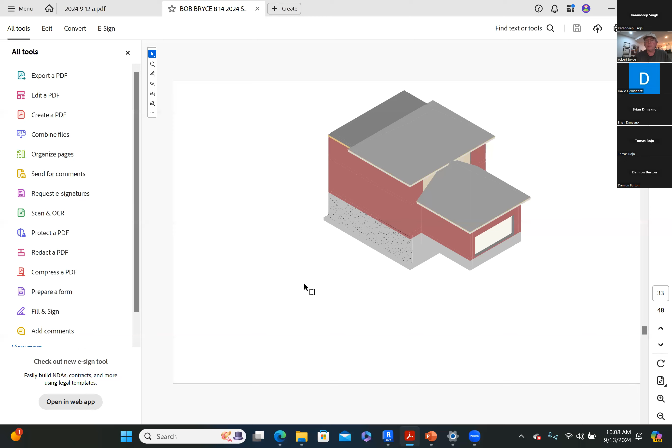I should have looked at the table of contents to see what sheet we should look at first, but anyway, this will work. Just scroll through - it's always a good idea to be familiar with the architectural plans, to go through all the different sheets.

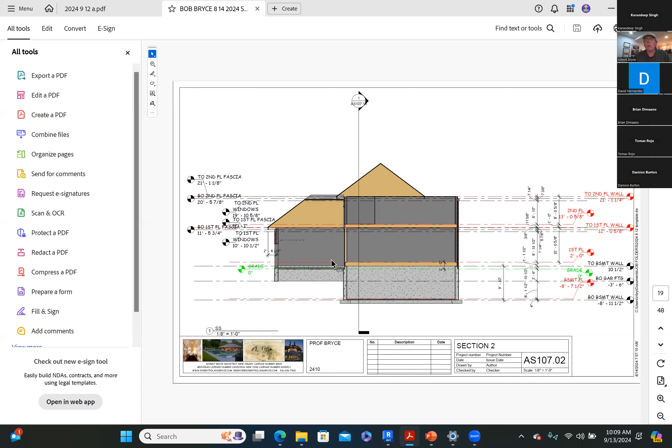I might be looking at - you know what, I think I'm looking at the wrong one. Yeah, I am looking at the wrong one. I'm in the right class though. I guess we'll just go over to Brightspace and do it that way.

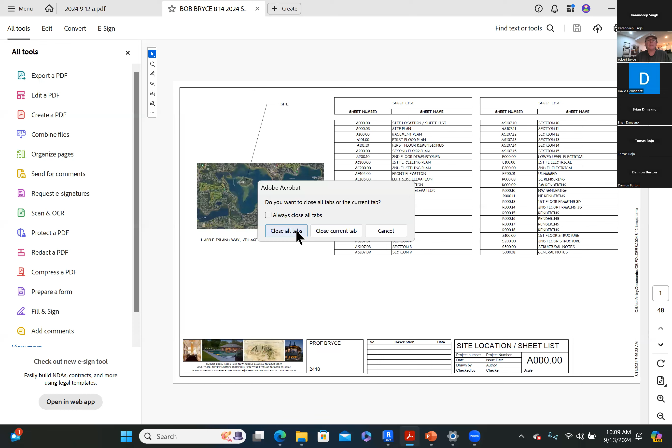So let's see, if I close this down, let's drag this over. Building service systems. I'm looking here to navigate to Brightspace - I'm doing it on the other screen. Okay, here we go - quick links, Brightspace.

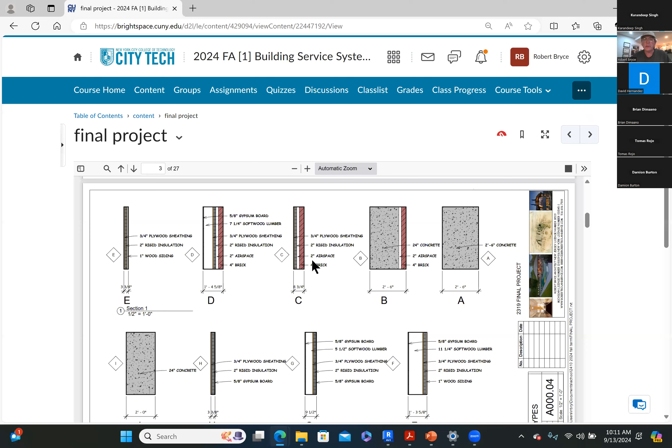So we're looking for wall type C, which is this wall, with 2" airspace and rigid insulation. Wall type C would be the brick area of the house. Let me make this a little smaller.

Wall type C has brick on the outside, so we can see it doesn't go all the way around the house. It doesn't go here because there's no brick on this part. So the answer is wall type C starts here and goes all the way around, but it stops here.

So for your linear distances, you would measure these distances. One of your classmates just asked—you would add these linear distances and then multiply it times the height. So let's go take a look at that wall type C.

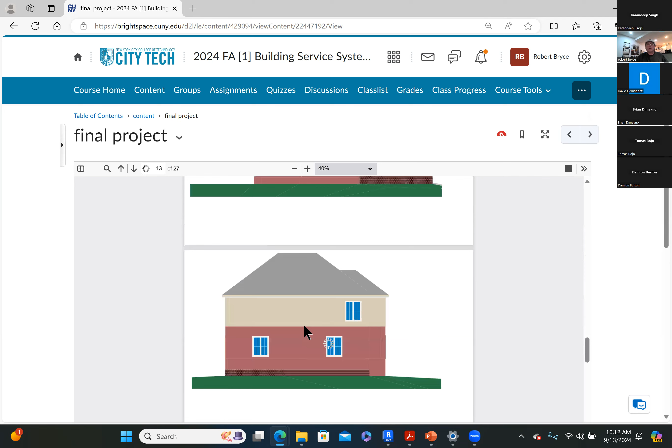See, it has brick on it. If we look at a section, where does that occur? We can see wall type C is right here. You can see that it's 3'6" tall. So that's going to be your height times the perimeter, which will give you the area of wall type C.

Does that make sense? Yes, Professor, I see that you were looking at the first floor. So based on each wall type shown on this dimension plan right here, it determines which floor it's on, because it looks like it's just below the first floor. That's why I was looking at the basement dimension plan.

Well, you can see this section cuts through the house at the garage. So you can see there is no wall type C on this side, on the wall that's common with the house and the garage.

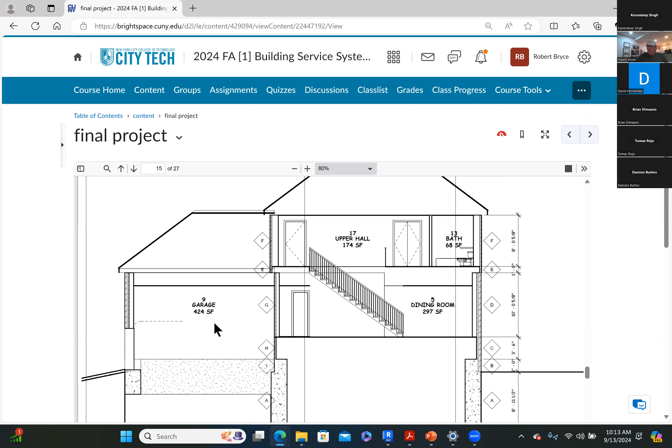We can take a look at the floor plan here and we can see. I just want to keep it documented that nothing is happening and that we both respect each other.

You can see that wall that's common between the house and the garage—this is the garage and this is the house—doesn't have wall type C. Everywhere else around there, it does have wall type C.

Got it. All right, any other questions about the project before we get started on the content of the course itself?

I'll just remind you that this is a very time-consuming project. Therefore it would be in your best interest to start taking the little baby steps towards finishing. Right now, just calculating the area of the different wall types would help you get started on the project.

I have also uploaded to the content area the spreadsheet you can use to answer the very first questions, which are: what are the areas of these different wall types? It's simple math—you take the perimeter and multiply it times the height, and that gives you the area.

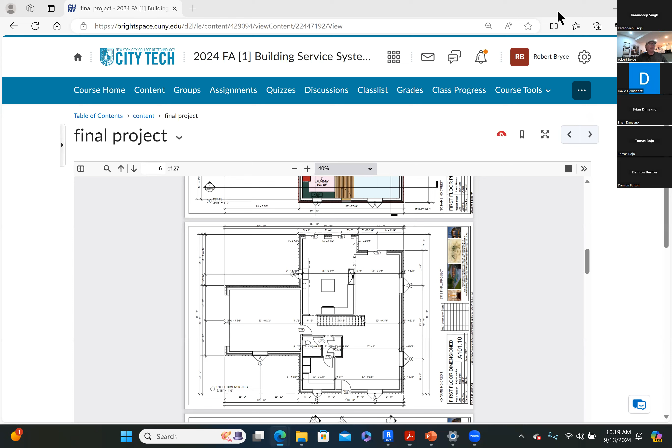Let's see if I can move this out of the way. We last left off talking about letting nature deal with things, but not actually following that tested true method of dealing with the cleansing of water, for example. We've decided to build huge processing plants like this, which is very expensive and very industrial, when we could let nature do it the way it has done for billions of years. Somehow we've come along and thought, well, we know better. We can do it better.

A possible argument would be that, like in Manhattan, there's no way we could use the earth to the area of Manhattan, because it's pretty much covered with buildings and hard surfaces, except for Central Park and some other parks, but there's not a lot of area. So the argument could be made that for some places, this is the proper solution. But as you progress into your profession, it wouldn't hurt you to ask, as you're trying to solve a problem you're paid to figure out or contribute to figuring out, to stop and say, well, how would nature do this? Could we use nature to do that?

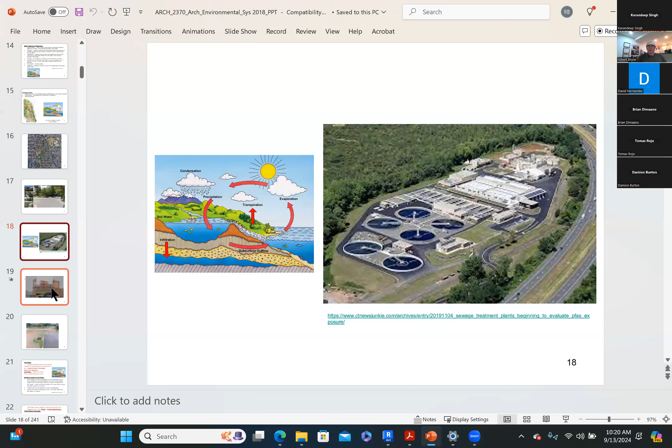I like to watch a lot of YouTube videos - that's my source of a lot of information, and also my source of entertainment. As you know, on YouTube you get all kinds of little videos that pop up, and I often see videos about construction disasters. I'll show one, and then we'll go to the next one and talk about it. I think if I click on this there might be a little ad ahead of time because it's YouTube, but we'll get to the disaster in a second.

That just happened to be an ad that came ahead. But watch this - watch what happens here with this house. It's a disaster. I like to watch these kinds of things only so that I don't make those same kinds of mistakes myself. In that case, when I design my houses, I wrap the entire outside surface in plywood, and you'll see that your class project has plywood wrapped around the whole perimeter, which would stiffen it up. I think they failed to do any kind of stiffening of that house, and that's why it failed.

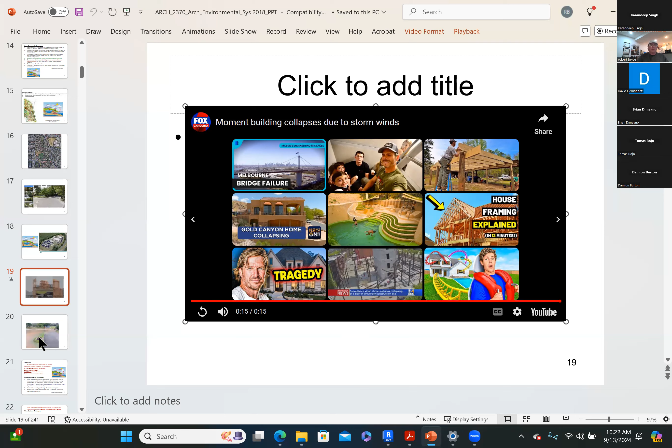But if we take a look at this one, this is also an example on those sites of bad design, when in fact it is environmentally a very appropriate design. I think the purpose of this was to demonstrate that this drainage inlet should be lower, not higher, than the surrounding area, so the water can drain into it. But if you take a look at this - I'm not saying it was done intentionally - this is the environmental way to do it, in that you let the earth percolate, let the water percolate into the earth first, and then when the water level reaches a certain height, you start to take the water away into our man-made solutions.

I was talking to a gentleman the other day about how we haven't seen this kind of flooding years ago. Communities didn't flood like they do now. One reason they flood now that they didn't before is there are a lot of hard surfaces.

This surface won't let any water percolate into the ground, but this one absolutely allows water to percolate into the ground, similar to that example in Davis, California, where they implemented things like this to let nature work properly. But in the event it got really flooded, we have a backup system that would take the water and relocate it to another area.

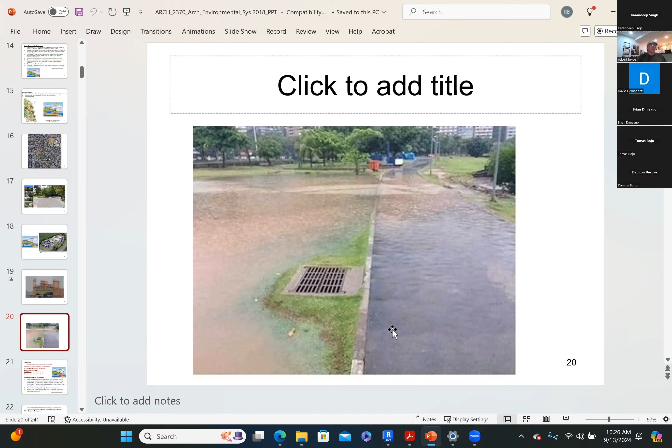So back to water. We talked about water percolating into the ground, and that's set up pretty much exactly like the example of the plastic bag hanging from the tree, where you put different filter materials in to get clean water. We're replicating what nature does naturally.

Inside the earth there's a tremendous amount of limestone. As water travels around that limestone, it absorbs magnesium and calcium from it. The water is still drinkable, but once it becomes saturated with that calcium and magnesium absorbed from the limestone, it becomes what we call hard water.

Hard water is not good for cleaning—it prevents soap from sudsing. We have hard water at our house because we have a well, and the water that percolates around the source our well draws from has a lot of calcium and magnesium in it. So we have to have a filtering system that separates the calcium and magnesium from the water so we can use it. Without that system, we wouldn't be able to wash dishes because the soap wouldn't suds and help clean. Same with taking a shower—the water and shampoo wouldn't suds up.

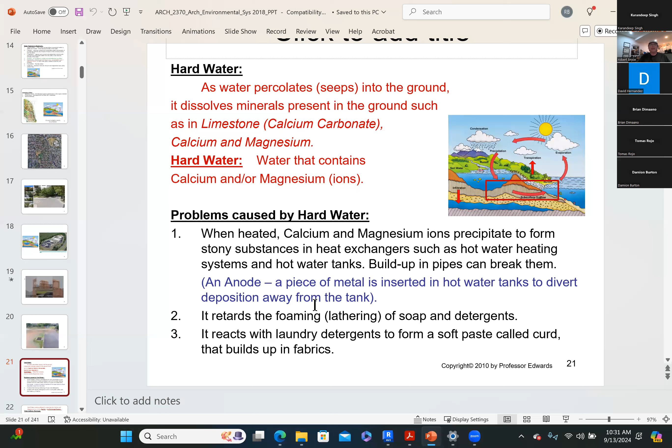It's also damaging to the water tanks. Dr. Edwards calls them hot water tanks, and I call them water tanks. The reason I don't use the word hot water is, well, you don't have to heat hot water, you have to heat water. If the water's hot, you don't need to heat it. So I call it a water heater, not a hot water heater, although some other people do call it that. It's a little pet peeve of mine - they're not hot water heaters, they're water heaters. But we won't be quizzed on anything like that.

So let's talk about the system we have here at our house. It's very simple, very typical in the methodology of separating the magnesium and calcium from the water. One of the methods is called zeolite, or the ion exchange process.

So we soften that by extracting the chemicals from the water in order to be left with simply the water that is not containing calcium and magnesium, which means that it's no longer hard water.

So what happens is we have to put some sort of solution into a big tank here, or in any water softening system. You in Brooklyn and Manhattan, up in Harlem, don't have those issues because that water is not drawn out of the ground - it's coming from the reservoirs. But if that water were hard, the municipality would extract the calcium and magnesium prior to delivering it through pipes into your own residence.

But here in a suburban residential setting, where we had to put a well down a couple hundred feet to get to that water source, that water that has percolated through there does have that, and it has to be separated.

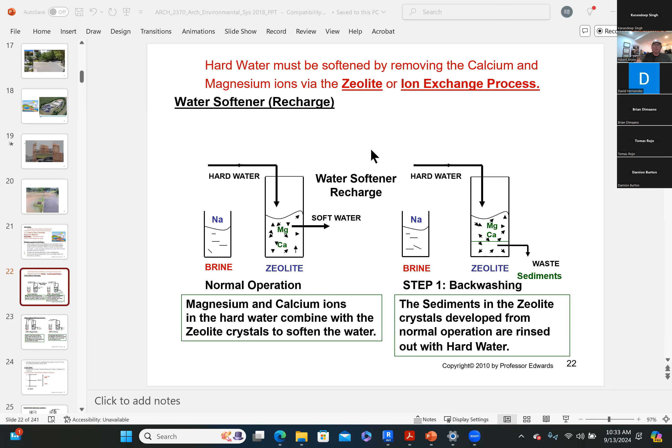So the ion exchange process, or zeolite, is a chemical process that absorbs the bad stuff out of the water, and we discard that portion while we keep the good stuff. It's like if you had metal in your water and you put a magnet in it - the magnet would grab all of the metal, and the water that remained would be free of magnets or metal. We're just trying to extract the bad stuff out of that water so we can use the good stuff.

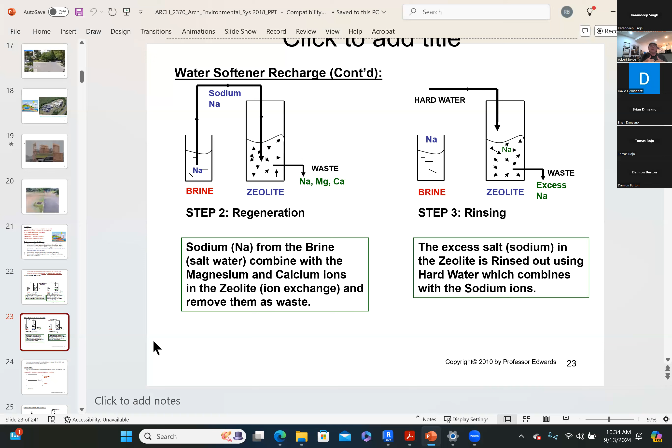Remember that in that water cycle, that circle I showed and explained to you, one of the designs of this natural system is when the rain comes down through the sky, it's designed to grab the impurities, the imperfections, and the pollutants out of the air and drop it back into the ground so the ground can filter that out.

But now we are burning fossil fuels and throwing carbon up into the atmosphere. Much of it wraps around this planet, not escaping out into the universe. Some of it doesn't even get to that point when the rain hits it and pulls it back down to the earth. So we're adding pollutants into the air - the rain is trying to still clean that out, but it's taking more than it originally had to, because before we started burning fossil fuels, we didn't have all that carbon in the air.

But that is also acidic - it's bringing acidic water back down. Now, on a scale, we measure how much acidity is in the water. And when we have a high level of acidity, it can be very corrosive and damaging.

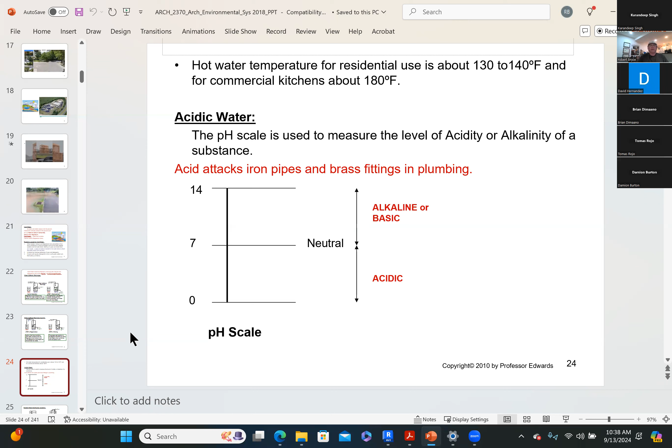What's next here? Okay, yeah.

So now we start to apply the movement of water into our daily lives. When we walk into our building on campus, what do we think? Do we say, oh boy, I hope the toilets flush, I hope there's running water on the 4th floor before I get into class today? No, because we expect that it will be there.

But if you think about it, generally the water is coming in from below the ground. If you look out the windows in our building, or basically any building, you're not going to see pipes of water suspended in the air anywhere. One of the reasons we don't do it that way is because water freezes, and we know that in New York it gets very cold, sometimes below the freezing level of water. And we also know that when water freezes, it expands. So it's very likely, or probable, that all the water supplied to the buildings in Manhattan and Brooklyn comes from below the ground.

Once you get below 3.5 feet, unless it's an extremely severe cold winter, the ground never freezes below 36 inches or 42 inches below grade. So it's very likely that the water main coming into your building is at or below what we call the frost line, which is, regardless of how cold it is outside, even for a long period of time, the earth is not going to get cold enough to freeze those pipes. That's why the pipes are laid underground, to take advantage of the insulating value of the earth.

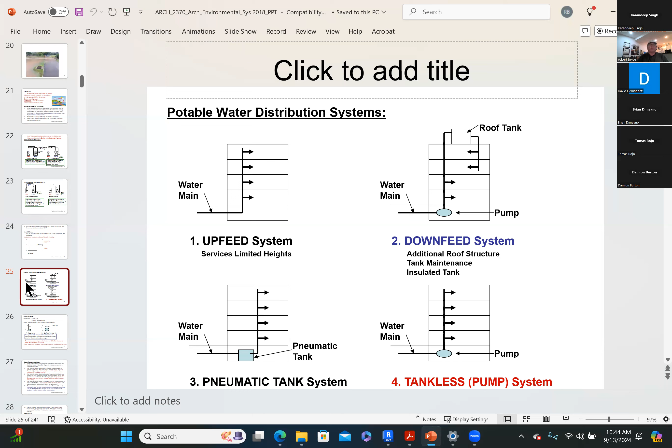Now, we're building up to a use - we've laid a little bit of a concept about what we need to do. And now we need to do a little bit different mathematic formulas here, which you don't need to be able to duplicate or replicate. But what Dr. Edwards has proven here in his logic is that the size of the pipe has nothing to do with the amount of pressure needed to push that water up in the facility. And he's saying that if you double the diameter of the pipe

with the height that you're trying to push that water up, if P1 equals force divided by area, so the force divided by the area gives us our P1, which is our pressure - Dr. Edwards is saying that P2 is going to equal 2 times the force divided by 2 times the area, which equals P1. Now, this is not a math class. You don't have to understand anything more than the fact that Dr. Edwards says the size of the pipe doesn't matter in terms of how much pressure you need to get the water from one elevation to another, higher elevation.

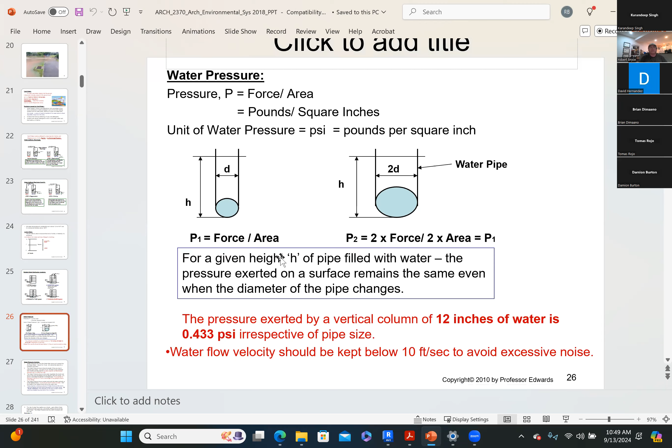So let's see what he has here. Okay.

Now let's analyze what's going on with this, because you will definitely see a story problem, which gives you information in a paragraph, and it might have some information that's not useful, just filler for the paragraph. I'll expect you to extract the important information from that word problem and apply it to the proper formula to answer how much pressure we need to provide to get the water from one spot to a different elevation in the building.

Remember, we talked about the water meter. That meter measures how much water passes from the supply side, coming from the utility company, to the usage side, which is the consumption side of the building. That meter is going to eat or consume between 5 and 10 pounds per square inch of pressure. So when water comes into the building and passes over that meter, we're going to lose 5 to 10 PSI from whatever the municipality was providing to get the water to the meter. The utility company has to push that water through the pipes to get it to our facility, so it comes pressurized already. But once that pressurized water passes across the meter, it costs us 5 or 10 PSI just to get through, because there's resistance on whatever device is measuring the flow.

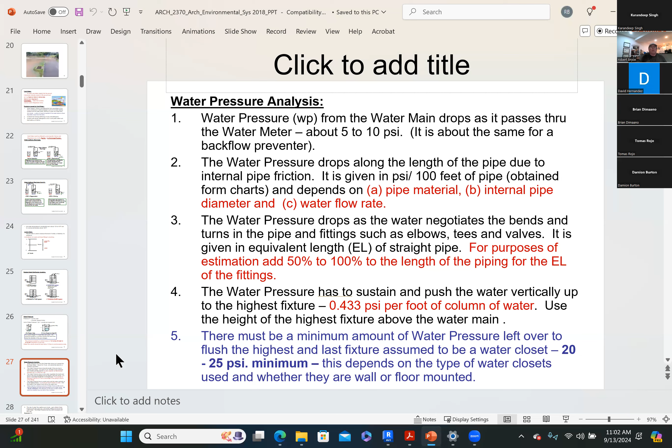We're actually going to have an example here. If I said, in a story problem, I told you all of this information, and you harvested that information out there, and I said the water pressure loss across the meter. Now we got the utility companies bringing water to the meter, and it's at a certain pressure, but we don't know what it is yet. And I say, well, we go across the meter, we're going to lose 5 PSI. I'll tell you the water pressure through the lengths of pipe are going to be 10 PSI.

And you're going to say, well, if it's 10 PSI for the horizontal lengths of pipe, I've got to double that. I've got to add that same amount, the equivalent length for all the bends and turns that it's going to take. And now the height of the fixture above the main is 100 feet. Well, everything else is in PSI, and all of a sudden I've given you a distance.

Well, what that distance is, 100 feet. We're going up vertically 100 feet. How do I convert that into PSI? You multiply 0.433 times 100, and that's 43.3. You can see that's how we got that 43.3 PSI.

So what's the question here? What is the minimum water pressure required at the water main? So if these were all dollars, how much water would you have, how many dollars would you have to get into the building and reach your destination? And the answer is, well, let's do some math here, okay?

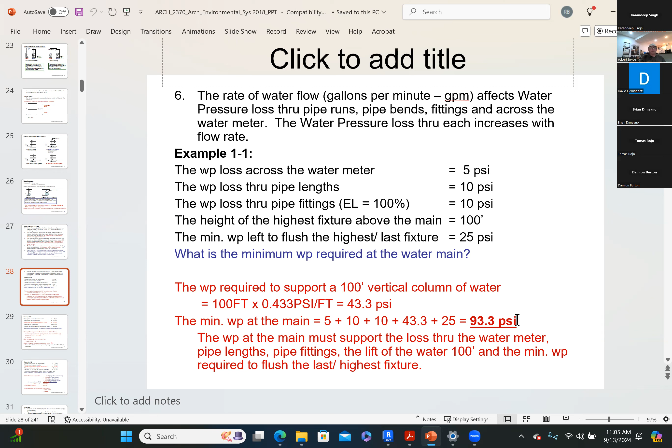So let's do another. Let's take the same situation. The water pressure across the meter is 5 PSI. In this example, the water pressure lost through the lengths of pipe is 15. You have to remember to add the equivalent length, which equals the water pressure lost through the pipe lengths. So that's 15.

And now, Dr. Edwards has told us what the water pressure is at the water main. This is how much pressure is coming in from the utility company. And he's saying that we still need that surplus of 25 PSI.

Different question this time. What's the maximum height that we can push that water up? Now we know all of this information, but we don't know what the vertical distance is, but we can figure it out.

So the water pressure left to support the lift of water at the highest fixture would be the water supply pressure, that's what came into the building, minus all of the losses of water pressure through the horizontal pipes and the bends and turns. And that surplus, we want that extra 25 PSI, the last fixture water pressure. So do we have that information?

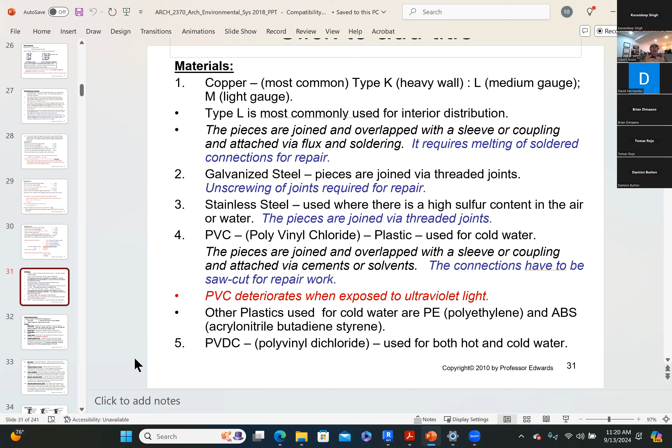You're going up, so you always multiply. The only time you would divide by 0.433 is if you're trying to calculate how high you can go.

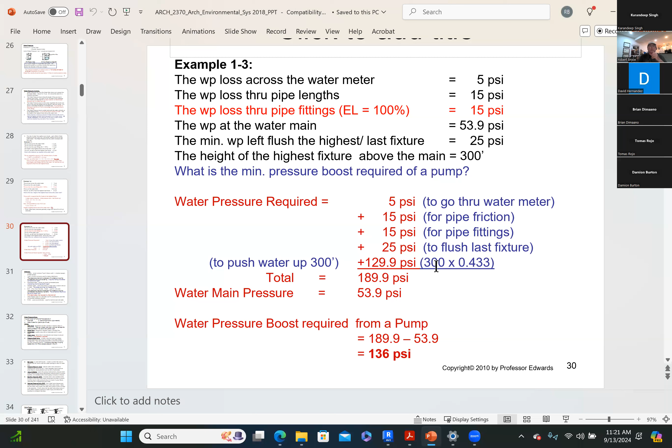So if, for example, we had 129.9 PSI left over before we went vertical, the question would be: how high can you go with 129.9 PSI? In that case, you would divide by 0.433, and the answer would be 300. That was the second example, where the question was how high can it go. You take your surplus of pressure and divide it by 0.433 if you're trying to determine how much height you can push that water up.

If you know how high you need to push the water up, then you multiply that distance by 0.433. But if you're trying to find out how high you can push that water up with the amount of pressure you have, then you would divide. Does that make sense?

Yeah, okay, that clarifies it. Yeah, so...

Let's say your car has 32.5 gallons of gas in the tank, and you get 0.433 miles to the gallon. To find out how many miles you could go, you would divide... this is how much fuel we have in the tank, this is how far you can go per gallon with that fuel, and that would tell you the distance you could go.

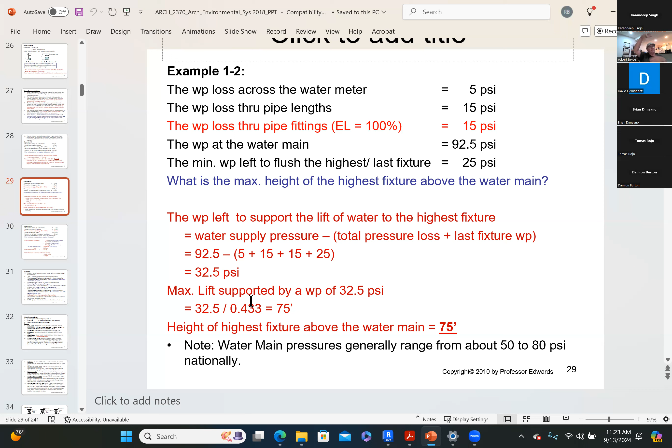All right, thank you. Anybody else? Any other questions?